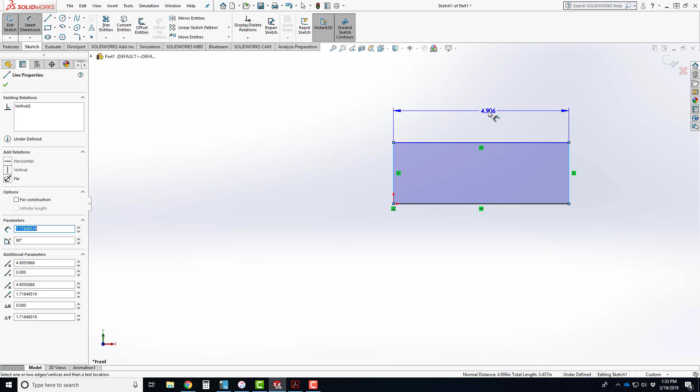So let's go ahead and corner rectangle, like that, and we'll give it a smart dimension length of 4.75, and let's give it a height of 1.5.

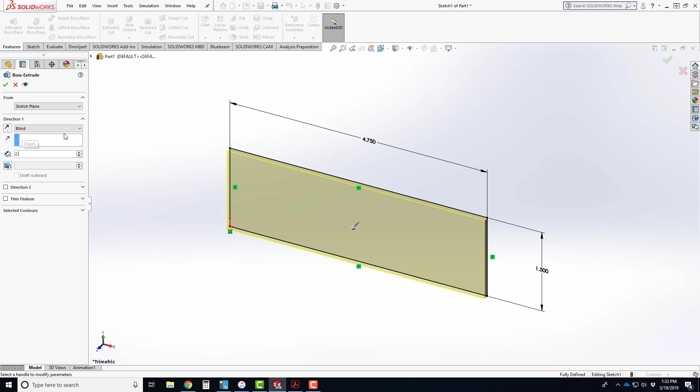And it looks like the depth is 2.625, so let's go ahead and take that. Features, extrude boss base, and 2.625. All right, so that is our box.

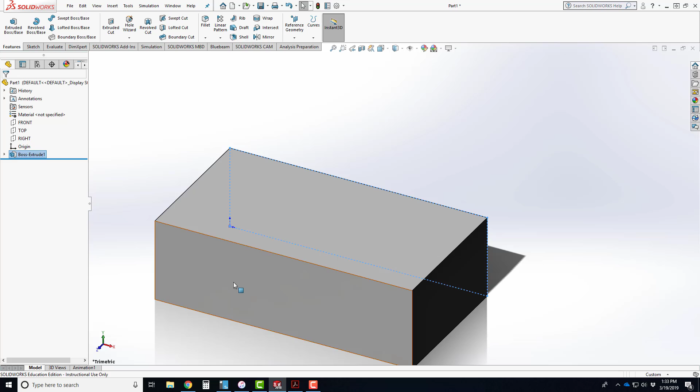All right, let's see, what shall we do first? Let's go ahead and cut out the front. I'm going to do the front a little differently than I've shown you before. We're actually going to make the bottom right cut, the bottom left cut, and then those angle cuts all at the same time. So we're going to sketch on here, but I'm going to do it a little differently this time. All right, and let's go to the front view.

And turn off the shadow there. All right, so here we go. So let's go ahead and corner rectangle. The first part's easy, these little corner cuts right here are no problem at all. Going like that. I'm going to do this purposely off so that I can give them some relationships there.

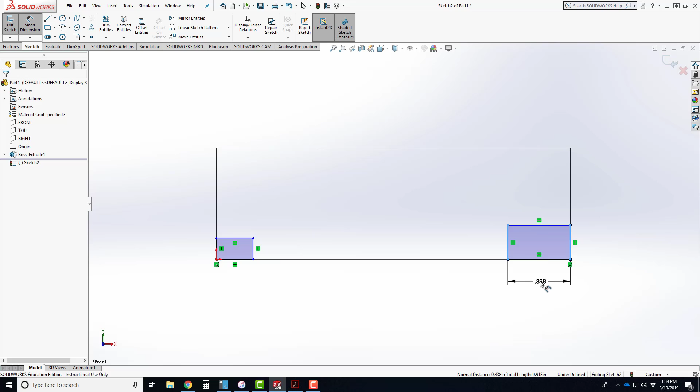And it looks like we have distance from here to here, and that's a 0.5. And we have from here to here, and that is a 0.25. And then we have, you guys remember this part, from here to here, and we have 3.75. And then notice we still have a blue line at the top there.

What I'd like to do, hit escape a couple times, is take that line, hold the control key down, and take that line and make them collinear. And you'll notice now they're both solid. So we're ready to go on those.

Okay, now here comes the funky part. We're going to do these angles, but we're going to do them a little differently than I've shown you before. I'm going to start with no shift, like in AutoCAD. We're just going to draw a line. Whoops, not like that, sorry.

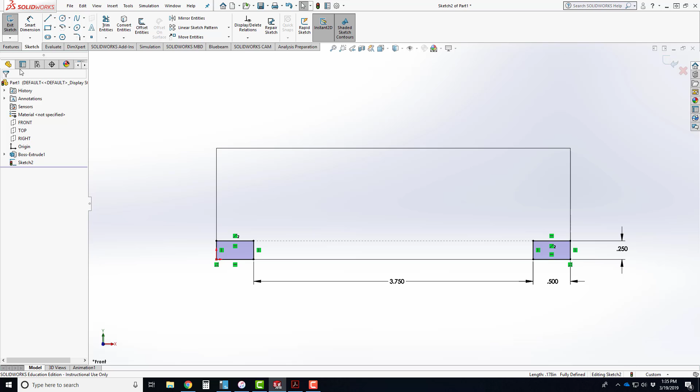Going to draw a line, somewhere along there, and I'm going to go ahead and pick that off. Now notice that it went to the midpoint right there. I'm not really interested in that midpoint right now, so I'm going to delete it. And I'm just going to, just so there's no orientation, and I do want it coincident to that edge.

I'm going to do the same thing on the other side. I'm going to go ahead and just draw a line here and plop it in. And that's coincident, that's coincident. So I do want the line, the edge to be coincident. So we're going to go ahead and make that coincident so we know it's on the line.

But notice that I don't have the top edges of the angles. Here's the way I'd like you to do it. We're going to do what's called convert entities. I don't want to draw a line on top of this because I might miss it. If you miss it, it's kind of a mess. So instead, we're going to convert it.

So we're going to convert this line and that edge, those edges, sorry, to lines. I'm going to convert, and I have the green check. And now you'll notice that they're lines, but they're going too far. So next we're going to trim those out.

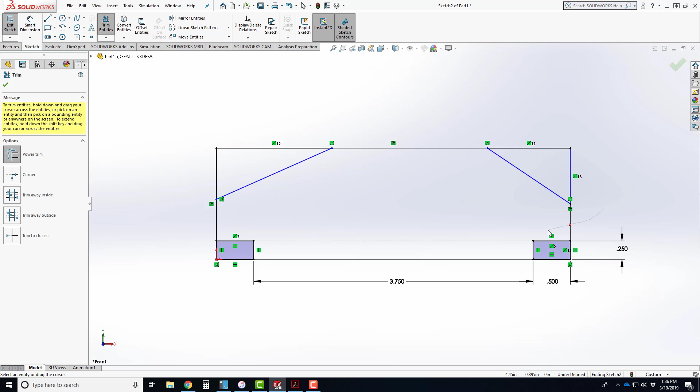And trimming is a little different in SolidWorks than in AutoCAD. When you do trim, all you do is just kind of hold your mouse button down and drag it. And as you drag through, it trims. Just left click and hold, drag it. See how that trims it? And then you'll notice that it's kind of creating the triangular region there.

And there we go. So check that out. That's pretty cool, huh? All right, so let's see. Then they give us a distance, smart dimension, from the top rather, to here. It's supposed to be 0.750.

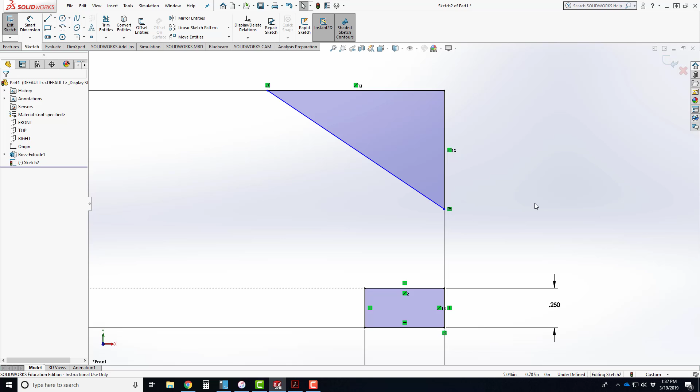Okay, the reason that's happening is because, see that midpoint right there? I don't want that to be there. I'm going to delete that midpoint guy right there. Okay, so I don't want you to use, it's almost like an O-snap, but be careful with those because sometimes they're right and sometimes not so much.

Pan over there. By the way, when I pan over, I'm holding the control key down and the middle mouse button down and panning left and right. Okay. All right, so let's try that again.

Smart dimension, I'm going to go from here to here. I do want it to be 0.750. It's because it was at that midpoint, so I'm just going to go ahead and take that. That's fine. And then I'm going to take, again, see that coincident? That's fine. So I'm going to take this point and hold the control key down and get that point, and let's make those horizontal. Okay, see how it moved down a little bit?

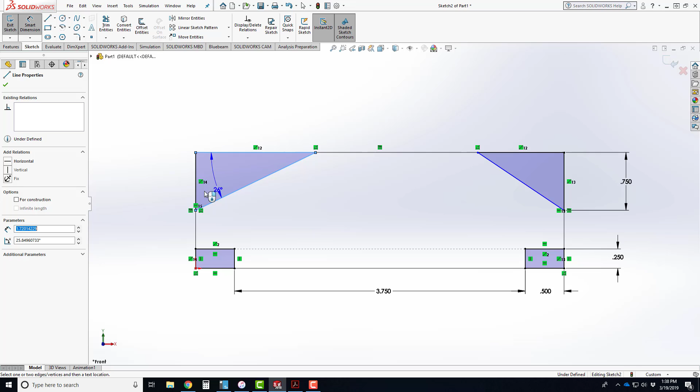Perfect. Now we need the 30-degree angles. So let's go ahead and smart dimension that from here to here. And let's give that a 30.

And we'll do the same thing over here. They gave us 30 on both sides, so we're going to do 30 on both sides as well. And you see that's not 30. We're going to go ahead and make it 30, boom.

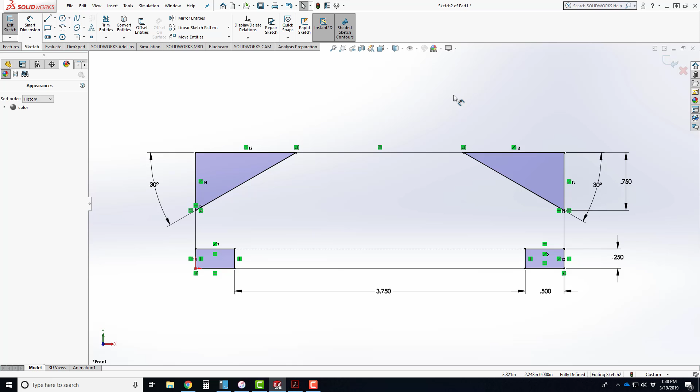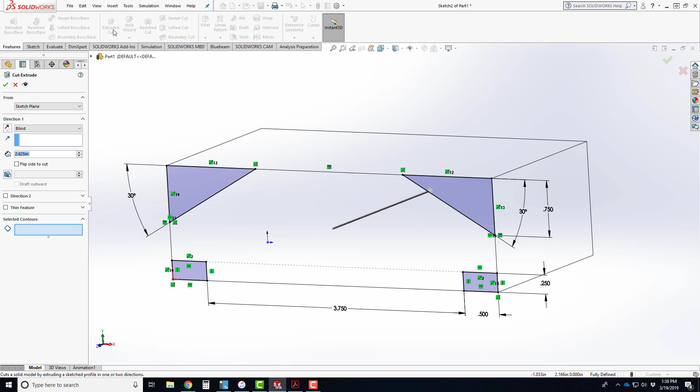You'll notice that we have black lines all over the place. So the idea is now we want to extrude that through. Let me just tilt this a little bit so you can see what's going on. We're on the front plane, but we get this weird issue in SolidWorks: if you're going to do more than one shape, when you go to extrude cut, nothing happens. There's no yellow there. You actually have to pick the surfaces you want to go through. So holding the control key down, you're going to pick that surface and that surface. It needs to know which ones you want to put through.

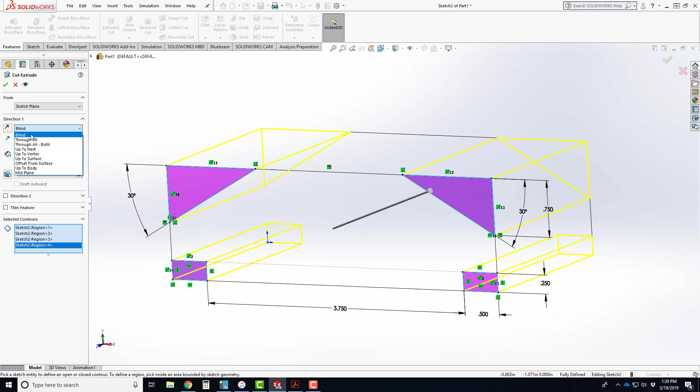And that one, don't pick the lines, just the surfaces. You'll notice over here there's 4 regions that we're shooting through. And then you see the yellow lines come. We're going to go ahead and through all that, and green check it. Boom. Nice. All right, let's see.

It looks like we have a couple more to do. We have a groove coming through here. So we're going to go ahead and pick on this surface and sketch on it. We'll go to the right side view.

We'll make that. I'm going to do the same sort of thing again because I'm not going to try to draw on these surfaces here. So I'm going to go ahead and create a box so I can kind of drag it where I want it. Obviously this box is going to this surface right here, but I'm just going to drag it through.

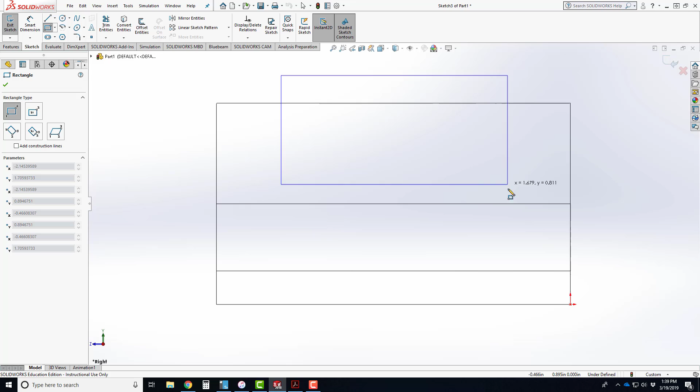And what I want to do is make this line and that one collinear. I want to make this one and that one collinear. So you see what I've got there with the groove, and then we're going to go ahead and smart dimension. I believe this was 0.438 both ways.

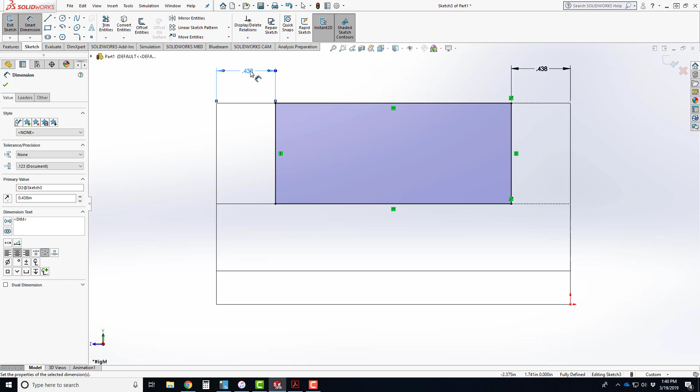0.438, and on this side the same, 0.438. And we have all black lines. I'll just tilt this to show you where we're at there. Notice it's kind of floating a little bit there, see that? It's because it's on that plane. It's not going to matter though. So we're going to go ahead and finish the dimension. We're going to features, extrude cut, through all, and green check it.

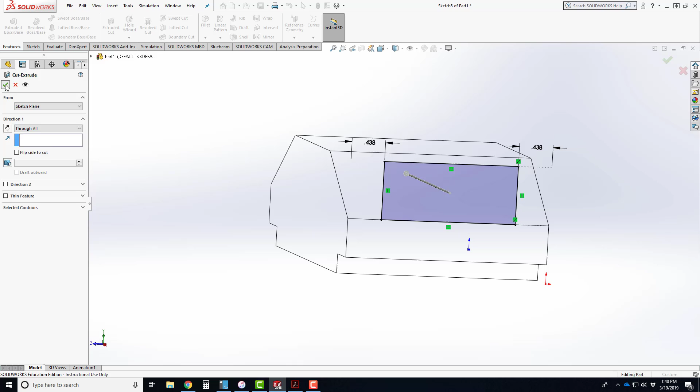All right, so we're almost there. Next we have a hole on the top, so we're going to go ahead and sketch on that surface right there. Right click and sketch on it, and we'll go to the top view. Let's go ahead and plop our circle in. Perfectly placed right there. Yep. And let's go ahead and give it a size.

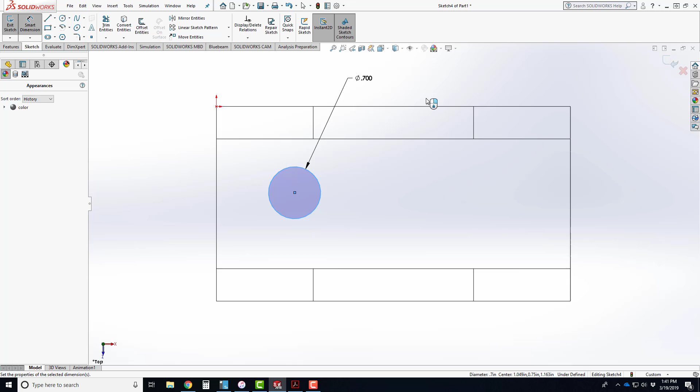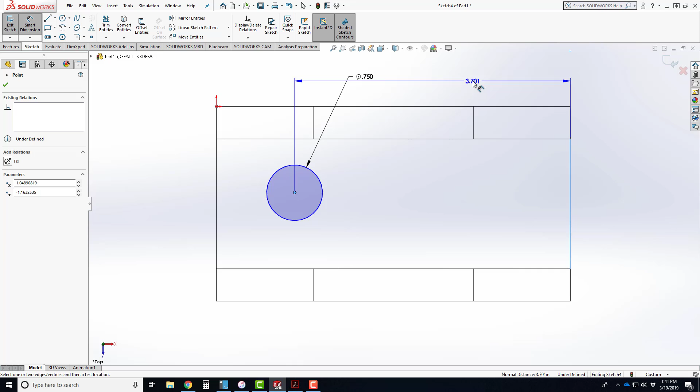I believe it's 0.750. 0.75. And let's locate it. I think it's 2.375 from the right. So smart dimension from here to here. Oops, missed it, sorry. Smart dimension from here to here. 2.375, and then from here to here

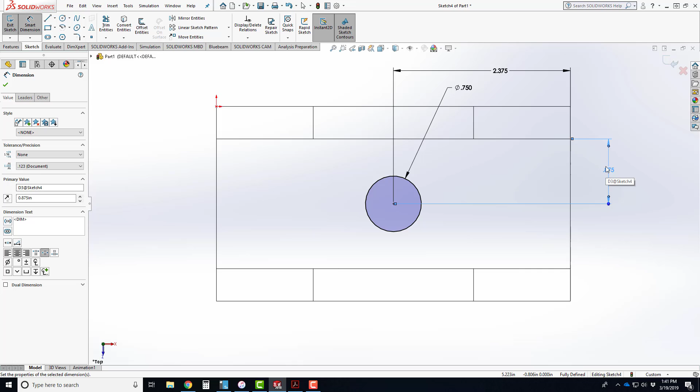is 0.875, like so. And we've got black lines. I think that looks pretty good. We'll go ahead and finish the dimension, features, extrude cut, through all.

So let's just kind of see what this thing looks like. Let's put this in a nice 3D view. And let's go ahead and put a little shade on it. So there's our part.

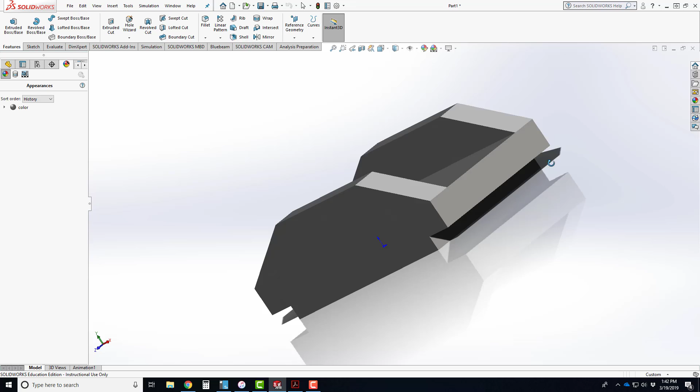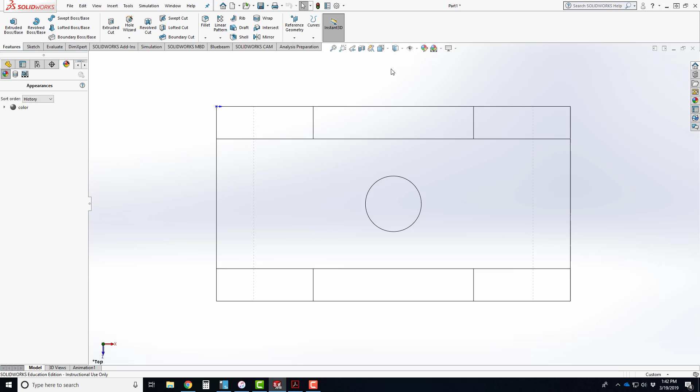And what you'll notice if I put this in a different graphics mode, hidden line mode, you'll notice that when I go to the front view, you'll see the hidden lines there. When I go to the side view, you'll see the hidden lines there. And if I go to the top view, you'll see the hidden lines for the groove going through. That all gets played out later on when we get into dimensioning and putting it on sheets. For right now, that's the part I'll be looking for.